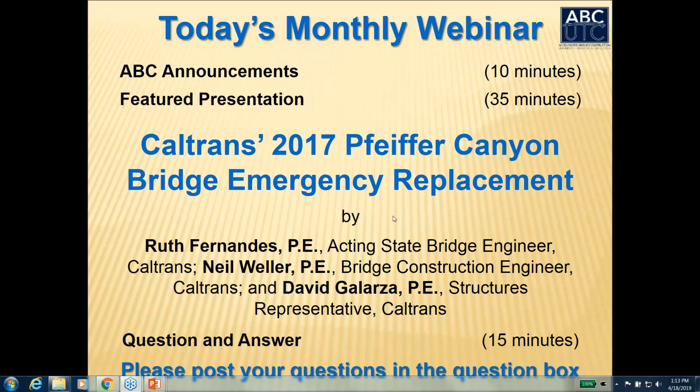Thanks, Mary Lou. This is Ruth Fernandes, Acting State Bridge Engineer at Caltrans. First, I'd like to thank the ABC-UTC for providing Caltrans the opportunity to share one of our more unique and exciting ABC projects with the national bridge engineering community. Today's webinar will be on the Pfeiffer Canyon Bridge Emergency Replacement Project located on Scenic Highway 1. This emergency project gave Caltrans the opportunity to use the ABC method of longitudinal launching for the first time in California.

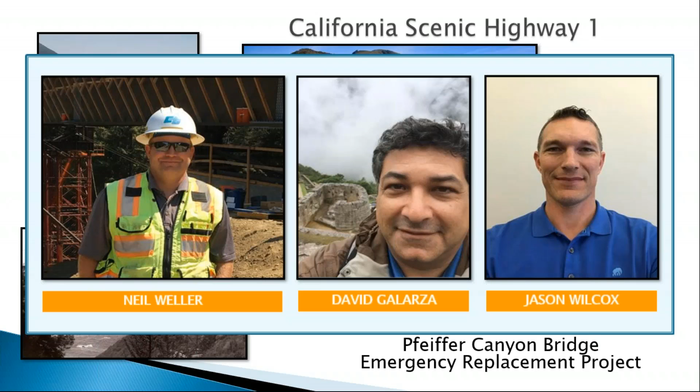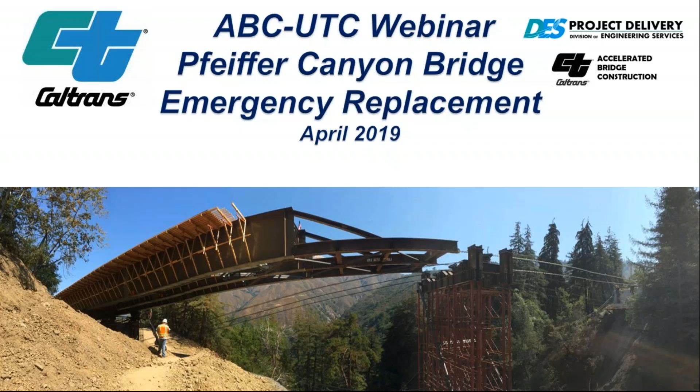Thank you, Ruth. My name is Neil Weller. I'm with Caltrans, and I'd like to begin our presentation. This is on the Pfeiffer Canyon Bridge Emergency Replacement Project. It began in February of 2017, and the completion of it was October of 2017 of the same year.

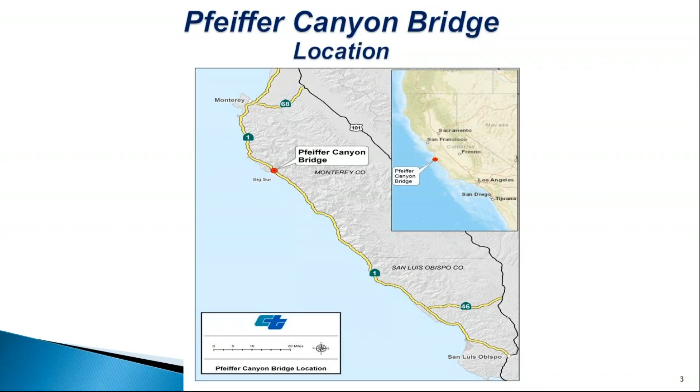I'll give you a brief overview of the location. It's in California on the Scenic Highway 1, located between Monterey and San Luis Obispo near the Big Sur community. Some points of interest along this route are the location itself, Pfeiffer Canyon, which is near Big Sur, just south of Monterey and Carmel. Some other areas I'll point out are Cow Cliffs, located to the south, Paul Slide, and also Mud Creek.

So the timeline of events for this project: the initial incident was discovered on February 11th, 2017, by a hiker underneath the bridge, who notified California State Parks and Caltrans. We ended up closing the bridge on Saturday, February 11th. On February 13th and 15th of the following week, we had controlled evacuations from the south. Later that week, large rain events caused the landslide underneath the bridge to further displace the Bent 3 column. On February 21st, a week later, the bridge was closed indefinitely.

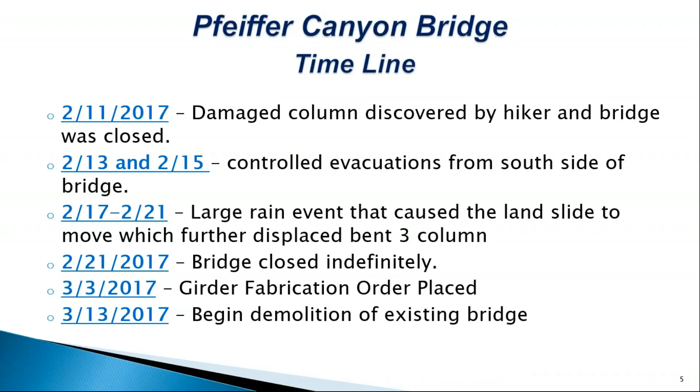On March 3rd, the girder fabrication order was placed. Approximately mid-March, we began demolition of the existing bridge. Approximately mid to end of April, we began foundation construction on abutment 2, to the north. Beginning of May, Highway 1 was permanently closed from the south at the Mud Creek site. A fairly large landslide occurred on May 20th, which closed Highway 1 from the south for approximately a year to a year and a half.

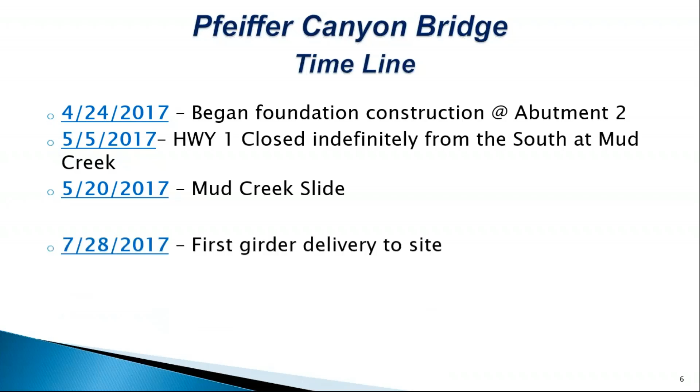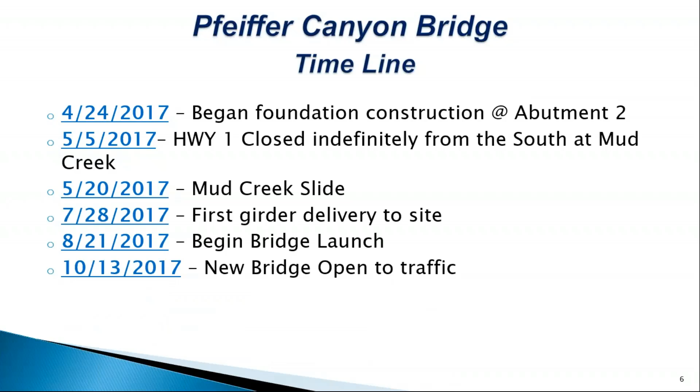End of July, we received our first girder delivery to the site. At the end of August, we began our bridge launch. In mid-October, the bridge was open to traffic.

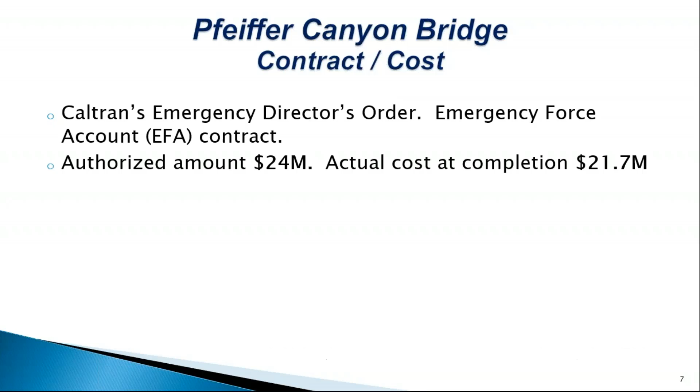To summarize the contract and cost: the delivery method for this contract was a Caltrans Emergency Director's Order. It was an emergency force account contract. The authorized amount was $24 million, and the actual cost at completion was $21.7 million. The contractor Caltrans selected was Golden State Bridge out of Benicia. The scope of work included demolition of the existing failed bridge, construction of the new Pfeiffer Canyon Bridge, reconstruction of the roadway facilities and conforms, and completion of the restoration work.

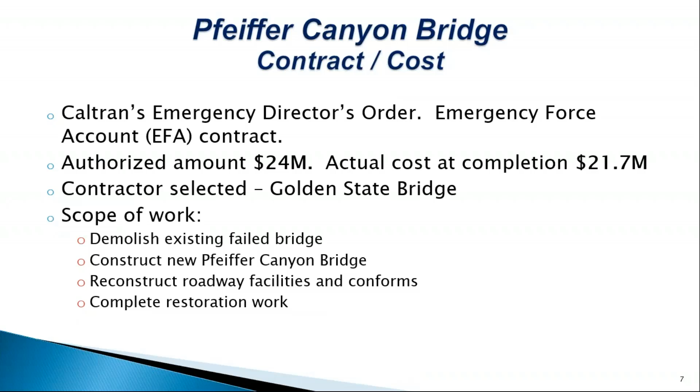The existing bridge was a 3-span, 3-cell, continuously reinforced concrete girder bridge. Bents were founded on single 6-foot diameter reinforced concrete pile shafts. The abutments were seat-type abutments founded on spread footings. Overall length of the bridge was 317 feet, with an overall width of approximately 34 feet. The traffic configuration was 1 northbound and 1 southbound lane with approximately 2-foot shoulders.

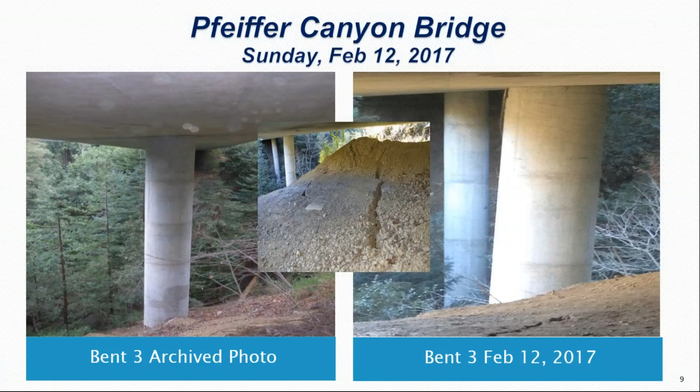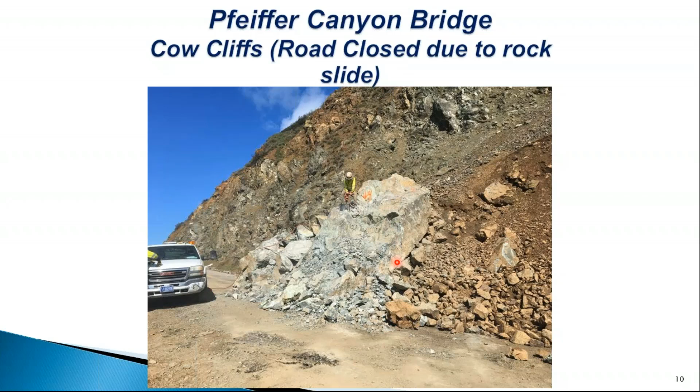This was down at Cow Cliffs, which I pointed out earlier. The road was closed at this location due to a rock slide and large boulders blocking the road. And I'll tell you why this is important.

Pfeiffer Canyon Bridge was closed to the north. The road was closed to the south at Cow Cliffs, so approximately a 30-mile stretch of Highway 1 was essentially landlocked. There was no way in or out. You have a large mountain range on the easterly side and the Pacific Ocean to the westerly side.

We came to the site and did some investigations, and we decided to allow controlled evacuations, to allow residents and also guests - there are numerous hotels located in this 30-mile stretch - to evacuate the area so they can go get some supplies or just go home.

We allowed approximately 3 controlled evacuations. We did 1 on Monday. We did 2 on the following Wednesday after the bridge closure. We did continuous monitoring of the bridge, the column, the deck, monitoring for deflections and displacements, and the bridge actually performed fairly well.

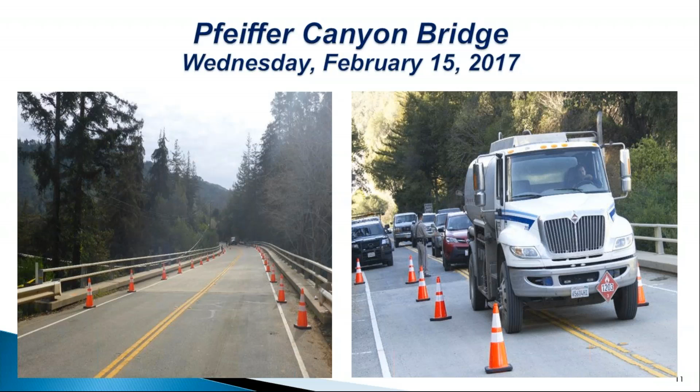The reason we did the last evacuation on Wednesday was because of an impending rain event that was forecasted to come Thursday through the following Monday. I believe the area received upwards of 4 inches of rain.

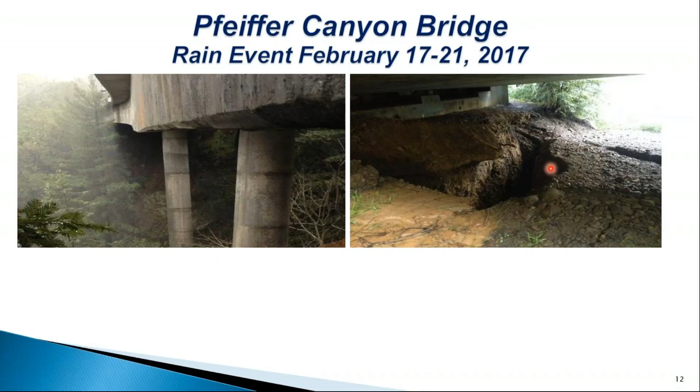As you can see, we had the initial photo of this crack, but now it's growing. So the landslide has mobilized even further.

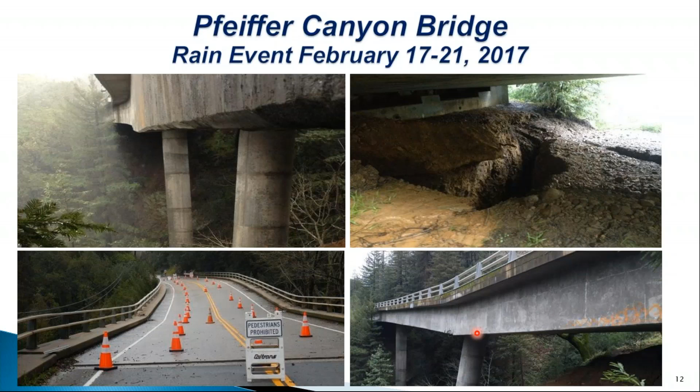Also, you can see right here there's obvious deflection in the deck itself, and also the girder or column support was further displaced. At this point, we closed the bridge permanently.

Here are some more photos of the actual damage from the landslide displacing the column. As you can see in the soffit, there are cracks, and also cracks at the column-soffit interface. This photo is from the southern side. So here's bent 2, and bent 3 is in the foreground, and you can see the displacement.

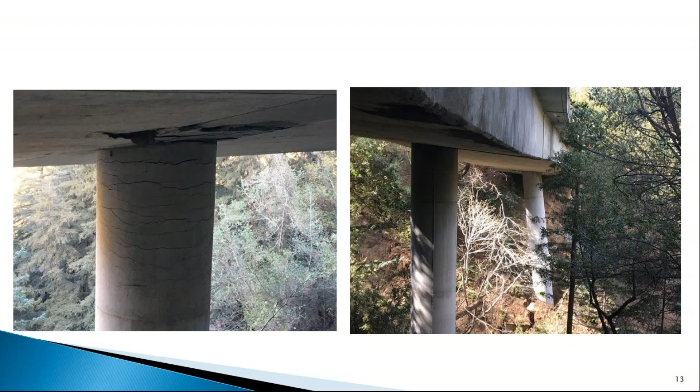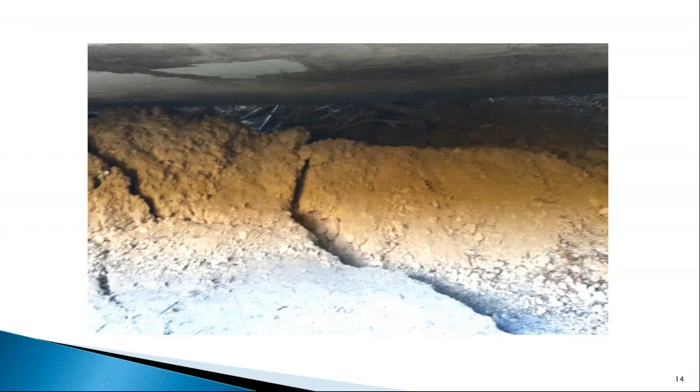Here's a video of underneath at abutment 4. This video was shot approximately mid-March, and it shows lots of displacement in the hillside, and then as we sweep to the left, you'll see the column being further displaced.

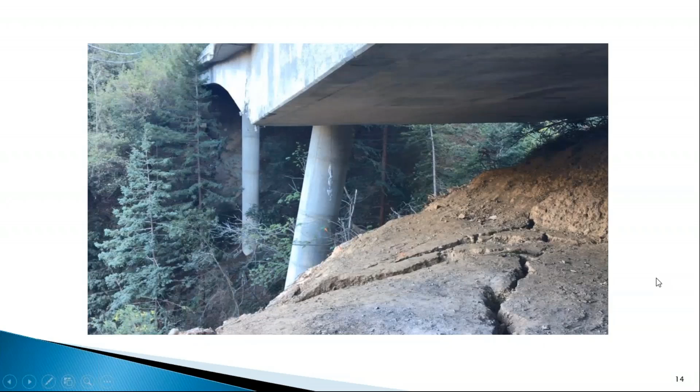And here are some more photos for that. The bridge never did end up collapsing on its own. We did have to demolish it, but this was the bridge in its final state prior to demolition.

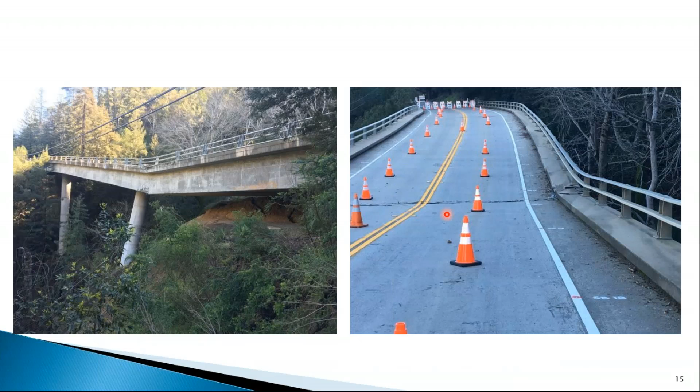Since we knew we had to replace this bridge, Caltrans formed a team to assess the site and come up with a plan. We ruled out conventional methods of construction, such as reinforced concrete or post-tensioned concrete, due to temporary supports being required in an active landslide.

If you see to the right side of your screen here, this is the area where the active slide was. There was no evidence of sliding on the left side, so we wanted to keep any type of supports out from the left side of the bridge.

We went with steel because we could go in shorter segments. The route from the north is a fairly narrow 2-lane road. We felt comfortable being able to navigate 60-foot long girders down the road. The one thing we had to eliminate were supports in the slide area, so we decided to go with a launch method, which would go over the slide.

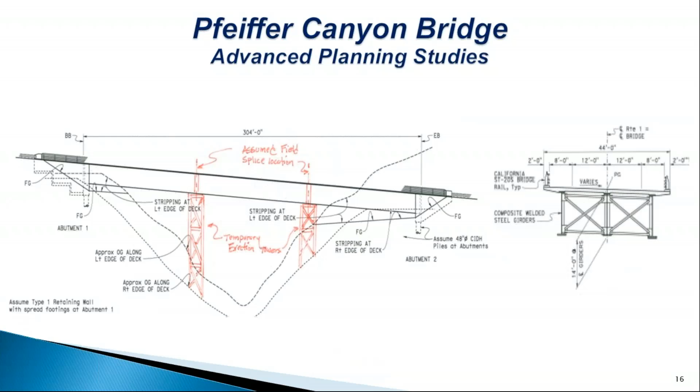The initial design was a hybrid girder with 70 KSI steel flanges. After investigation, finding out that material procurement may be an issue, we came up with two designs: a hybrid option with 70 KSI steel, and an all 50 KSI steel option.

So the final design was a 315-foot single span bridge, spanning the canyon in the slide area. The girders were 50 KSI steel composite welded steel, approximately 14 feet tall. The webs were 1.25 inches thick, and the thickest flange was 4 inches. The bridge had 3 girder lines that consisted of...

In addition to the final design, we did provide 2 different designs. The 70 KSI steel design had the webs and top flange being 50 KSI steel, and the last 2 segments were all 50 KSI steel in the low moment regions, while the middle 3 segments' bottom flange were 70 KSI steel. As I stated before, we went with the all 50 KSI steel design.

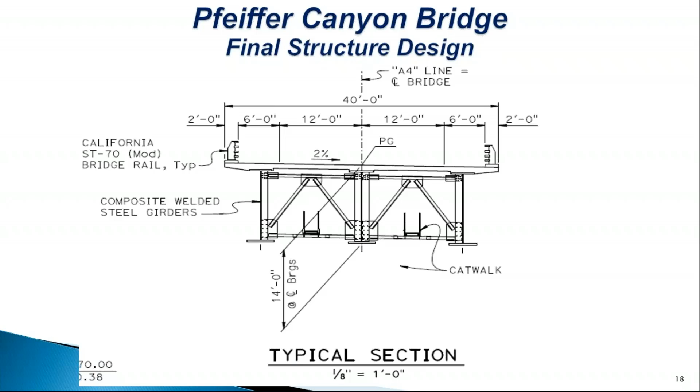Things we changed in design to accommodate the launch process: the bottom flange had to be flush, so they could roll over the rollers. What that ended up creating was a variable depth web.

Another thing that we did was with the bottom splice plates. We had them in 3 sections, and we eliminated the middle section of the splice plate to accommodate the rollers. These were later installed after the launch was complete. You'll see that here - middle section omitted - and you can see that's completely flush.

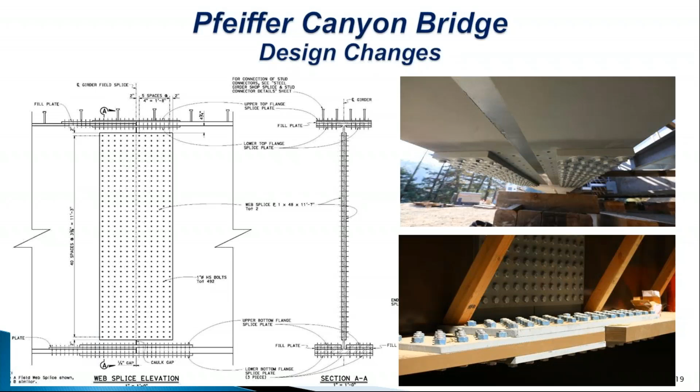Good morning, everybody. Now, to give a quick recap of the timeline, the deflected column was found February 11th, and by February 28th, there was a set of check plans for fabricators to bid on.

First being a 3-line hybrid grade 50, grade 70 high-performing steel option. Second being the 3-line all grade 50 option, and then anything else the fabricator could come up with. The weathering steel was excluded because the project is just under a mile away, about 9/10 of a mile away.

So the request for proposals were due 41 hours later on March 3rd at 10 a.m. Caltrans construction design met myself, and then the contractor Golden State Bridge met at 1 o'clock that same day to go over the estimates. From the outset, it was agreed that schedule was the driving force, and delivery start time and end dates were weighed heavily.

As Neil said earlier, a primary concern was the availability of steel and the grades and sizes required by the design, which we learned was between 8 and 12 weeks.

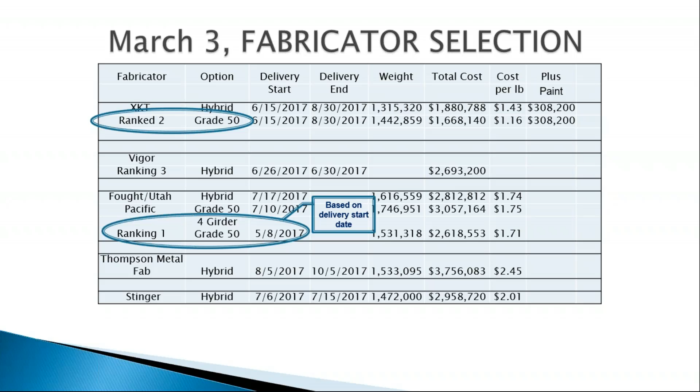And we were discussing the merits of that when it was realized and noticed that XKT had submitted a revised proposal that came in just before the deadline. In that proposal, there's the cost, and they said that they spoke with a Nucor mill, and said that for an extra $457,000 about, they could expedite the delivery, and their delivery start date for the girders would be April 15th.

So this was being discussed, and me and a coworker reached out to the owner of XKT to confirm that this was even an option, and they said that they would be willing to sign a contract to this effect immediately. So within 10 minutes of finding the revised estimate, XKT was chosen.

To add to this timeline, this decision was made on March 3rd, and on March 3rd, as Neil said, orders for steel started to be placed out, and by March 8th, about 800 tons of steel was ordered. By March 11th, Nucor began rolling steel that was not already available, and by March 17th, the first plates arrived at XKT. Because of the speed of the project and shop drawing review and revision times, we had to hold off just a little bit, but on April 4th, the first girder web plates were being cut.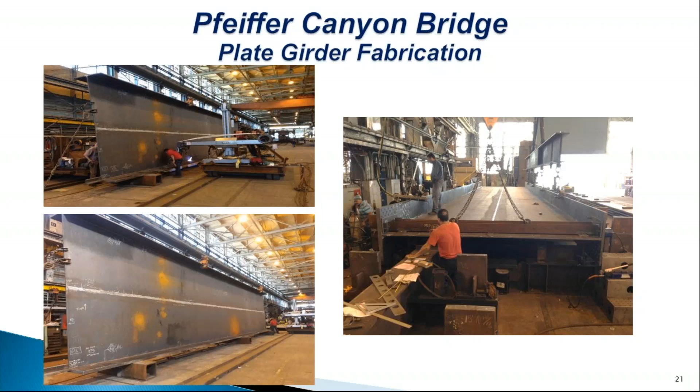This is a side view of the 4-inch thick bottom flange, the A709 Grade 50, 4-inch thick bottom flange. Just like the webs had to have a longitudinal splice, the bottom flanges were so thick that the mill could only make them in 30 to 35-foot segments, so they had to actually do a horizontal splice on these. I'm going to go through all of these.

The first girder rolled out of the shop to the fit-up yard on May 10th, just 36 days after the first web plate was cut and just 2 months after the steel was ordered. Camber was checked with 3 adjoining segments, and the remaining flange and web holes were match drilled.

To facilitate assembly and erection in the field, it was agreed to fabricate the first segment of each girder line first, then the second, and so on. Once the first 3 segments of each line were checked for camber and match drilled, the first segment of each line was sent to the painter, R&B Coatings in Linden, California. Trial assembly was completed on June 21st, and the final 3 segments were shipped to the painter on July 24th.

The paint used was polysiloxane, and the finish coat was applied in the shop. This polysiloxane for this application was estimated to last between 60 and 100 years, and it was applied over inorganic zinc primer at the shop. The first 3 segments arrived on site around July 28th, just 167 days after the column issue was discovered.

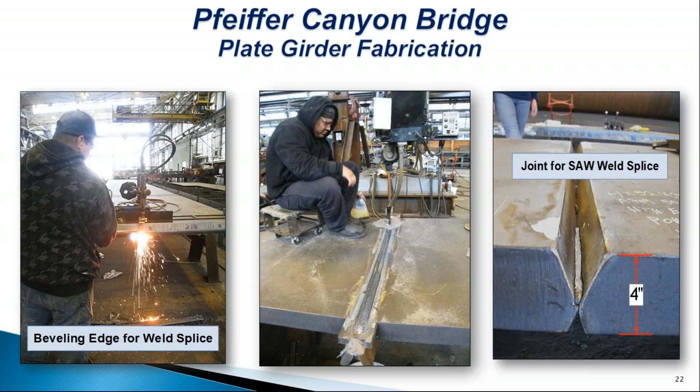And with that, I'll pass it back to Neil. Thank you, Jason. So real quick, I just want to go over some of our construction challenges in the field.

As you know, this is a very scenic, windy, rural road, Highway 1, in between San Luis Obispo and Monterey.

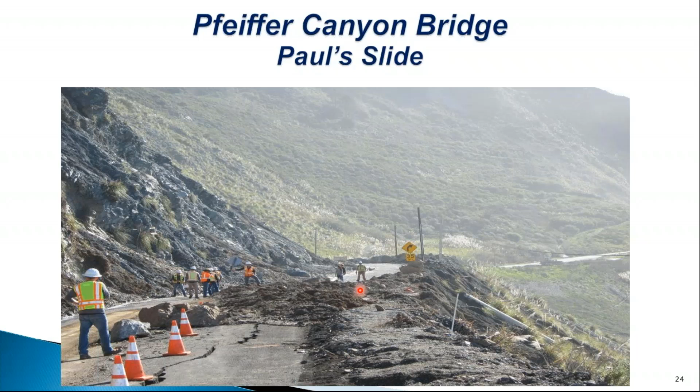This is Paul's Slide. As you can see, the road is, we had an active slide, and right through here, I have an aerial photo coming up next, but a crib wall actually failed here. We're down to 1 lane.

Mud Creek, this was a daily occurrence. They had to clear the road every single morning to allow, essentially the road was closed, but to allow construction traffic and Caltrans crews to get through to do their work.

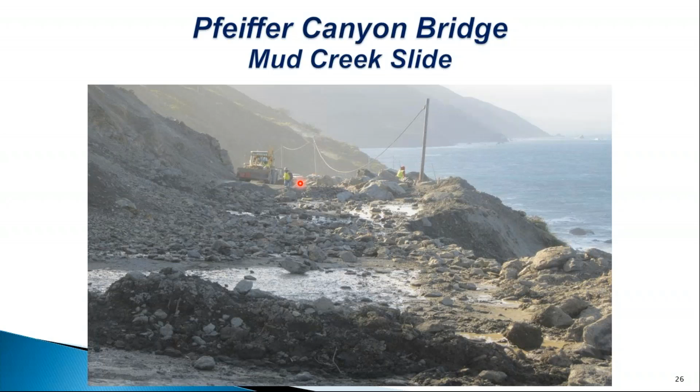On May 20th, I believe it was, here is actually the Mud Creek slide. As you can see here, this is Highway 1 to the north and to the south, and this added roughly 10 acres of new coastline to California.

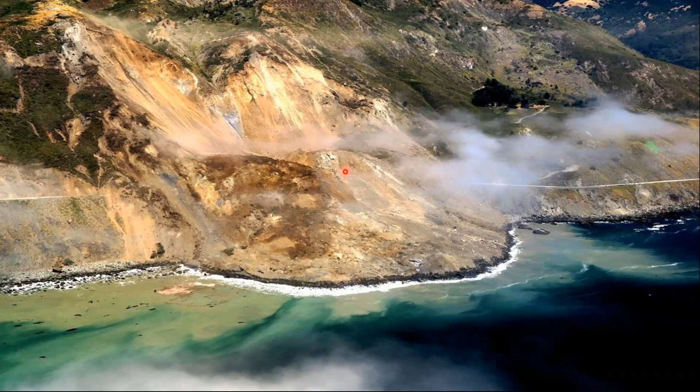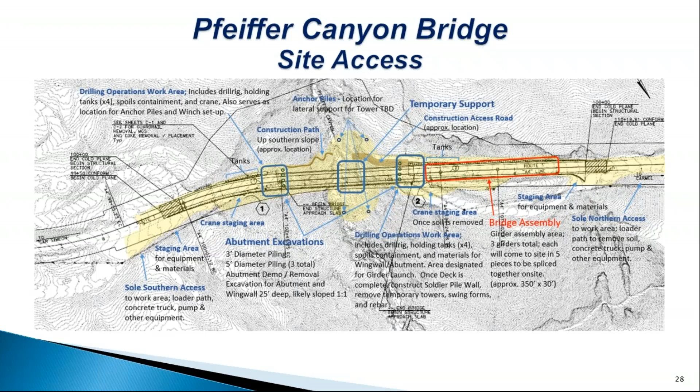Canyon access was very steep. To the south, a very steep slope, which was very stable. And here's the active slide area with the famous column that was damaged.

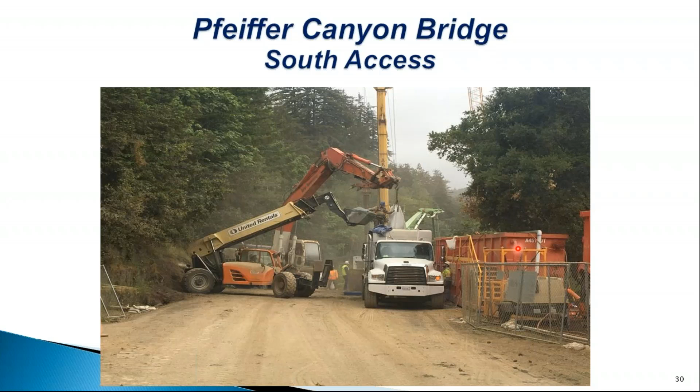Here's a shot from the south side. We ended up using mobile concrete mixers, and all the supplies needed to batch concrete were staged on the south side. As you can see, very narrow work area to work in. Access from the north, same thing, very narrow. We could only do a few operations at a time due to the limited constraints.

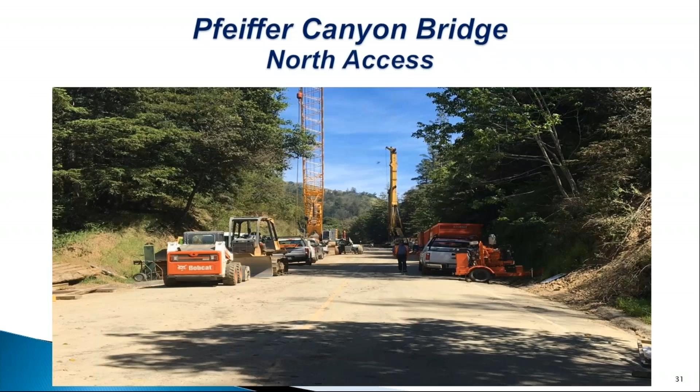Here's some photos of the bridge demolition. Here's span 2 coming down, and its final resting spot, and span 1 coming down.

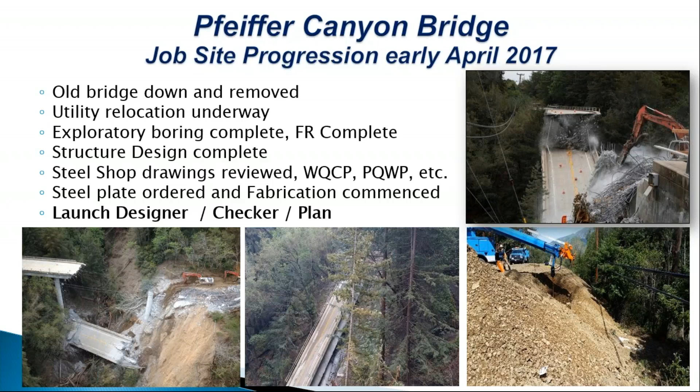Over the next several months, from April to July, we focused on constructing the abutments on the north and south. These are cast-in-place abutments supported on cast-in-drilled-hole piles, 5-foot diameter, approximately 80 feet deep. They were cast using the slurry displacement method, as there was still quite a bit of water in the surrounding hillside. We had also commenced work on the temporary tower, a prefabricated element on a step foundation.

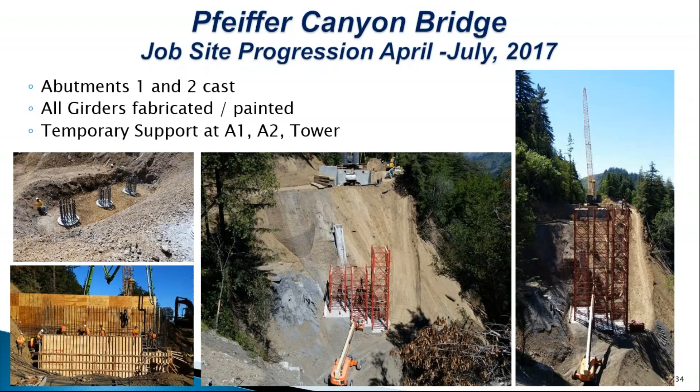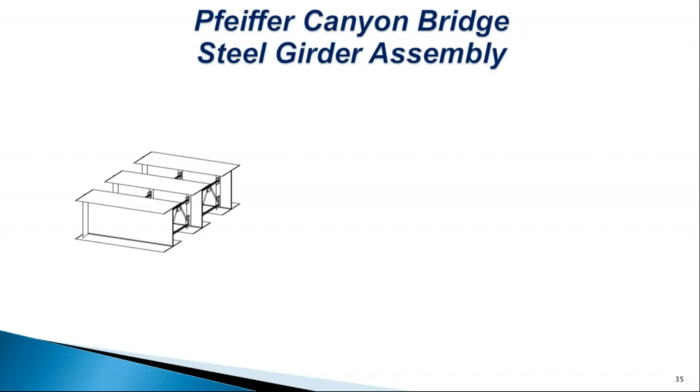This little animation gives you a graphic of the girders and how we planned to assemble them in the field. Essentially we have 3 girder lines. Each girder was broken down into 5 62-foot long segments for a total of about 310 feet. Each girder weighed approximately 60 tons, though some were a little bit lighter than others, especially toward the end span.

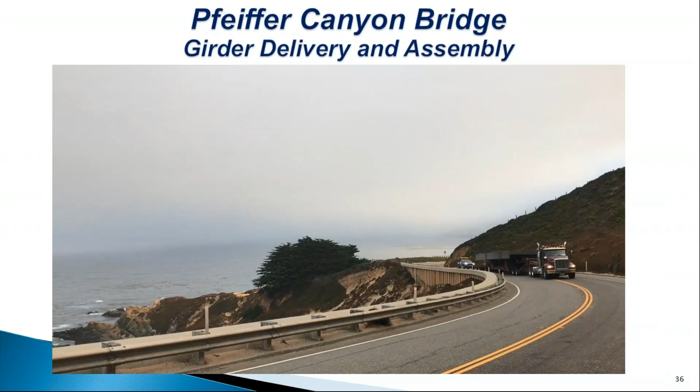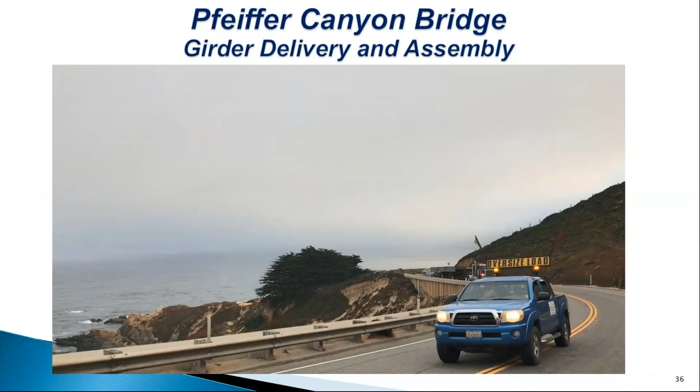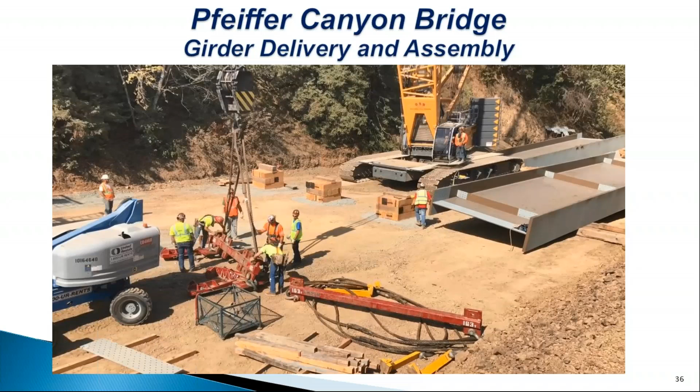This short video shows delivery of the girders. These are coming out of Mare Island, approximately 200 miles north of the site, maybe a little further. These are about 60 tons each, and we'd bring them out in 3 segments at a time. They were offloaded from the trucks and then positioned on dunnage, which was graded to the camber of the webs to facilitate splicing. The girder is erected into vertical position and then moved to mate with the adjacent preset girders.

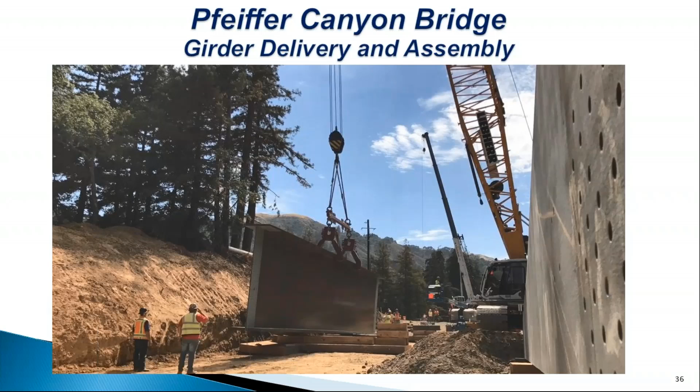The launch plan developed by Somerset was broken down into 5 distinct areas: the assembly area, which we saw in the short video, and connected to its leading edge is a launch nose. The purpose of the launch nose is to collect the tendons doing the actual pulling of the girders and distribute them equally among each of the 3 girder lines. It's also there to extend the reach of the girders and act as a lightweight section.

Because the temporary tower was very good at resisting vertical loads and not very good at resisting any horizontal loads, it became necessary to ensure that the nose of the launch rode up and over the rollers at the temporary tower. This was accomplished by lowering the girders in the assembly area, the temporary support in the assembly area, and thereby pivoting about the abutment 2 temporary support, raising the launch nose so it would ride up and over the rollers, as shown in stage 5.

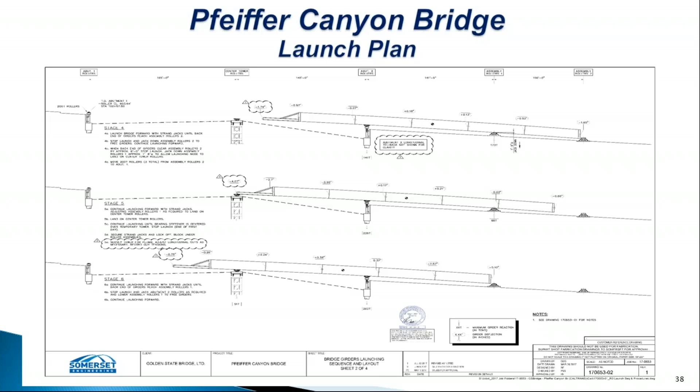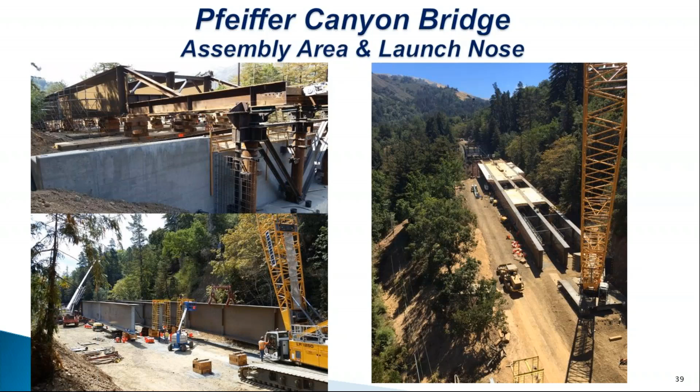That's what's actually performing the work to pull the assembled girders across the canyon. They're topped with a pair of 200-ton Hillman rollers, two 200-ton Hillman rollers, and at the top of the pipe supports, you notice a couple of 1'4" sections. Those are to be removed later so that we can adjust the trajectory of the launch.

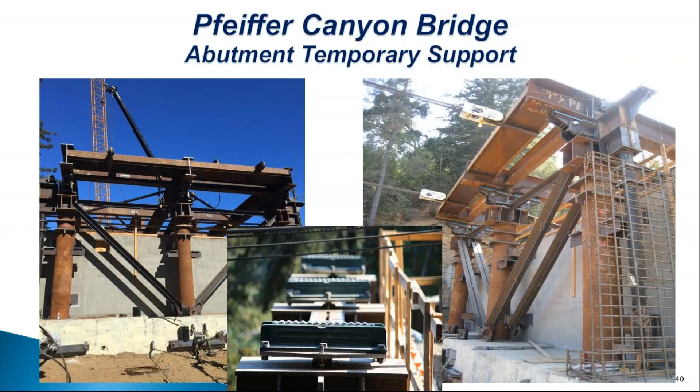The temporary launch tower is a Waco tower, very efficient at carrying vertical loads. This tower was comprised of multiple 100 kip legs, but not very efficient at addressing any horizontal loads. So restraint was provided by some push-pull pipes. These are taking up any transverse loads and are founded on two CIDH piles.

At the top of the tower, it's connected to a grillage that houses the assembly rollers. In the longitudinal direction, each roller was restrained by two 3/4" wire ropes that are cast into the abutment face. As you can see, those wire ropes are going directly to the rollers so that as loads are induced or as displacements want to be induced into the tower, they're picked up immediately and dragged back to the abutment face.

On the far side of the canyon is the jacking frame. The jacking frame is also made up of heavy steel section and bolted directly to the top of the end of the wing wall. The wing walls are prop supported on 36-inch CIDH cast-in-drilled-hole pile, so there's deep foundations that the loads will be directly braced to.

There are two hydraulic jacks. These strand jacks are 235 kip capacity. Somerset calculated that he needed 110 tons of force to pull the girders across the canyon. Now, he purposefully designed these to have double the capacity that was needed in case one of these needed to get repaired or there was a malfunction. The remaining jack could hold the entire assembly in place.

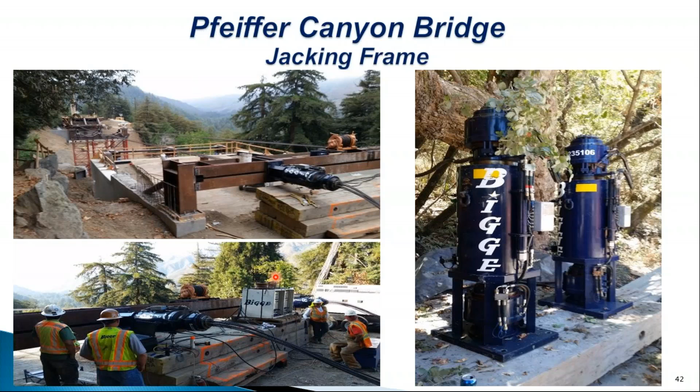In our schedule, we had allocated 3 days for launching, and we essentially accomplished that. It went off very well. There was very few incidents as we came across.

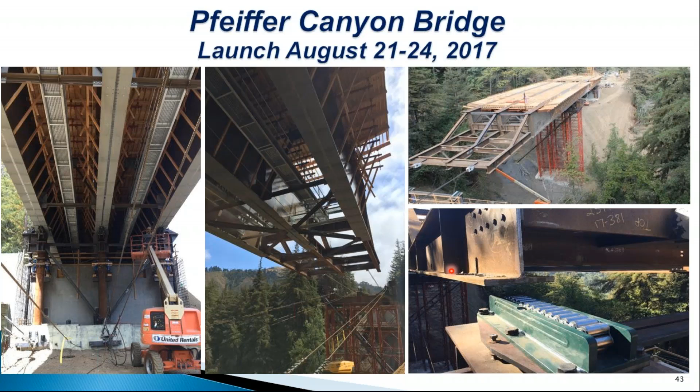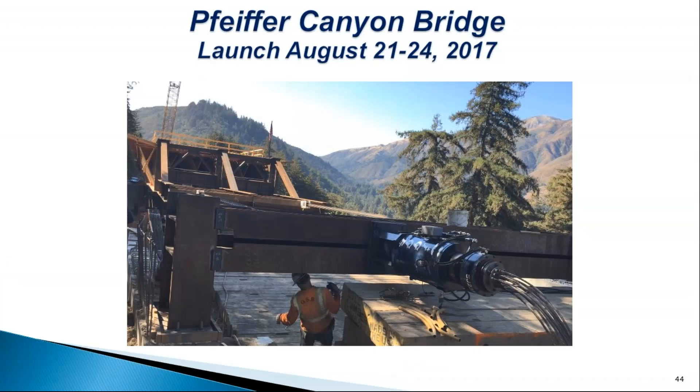It's a short time lapse video of the hydraulic jacks working. You're looking at the left jack right now. The right jack is progressing similarly. This is about an 18-inch stroke.

For those of you familiar with stressing post-tension bridges, this is very similar. This is an all-encompassing unit, so it's got a stressing head, and it's got some relieving wedges that go ahead and grab and hold the system in place once it's cycling back.

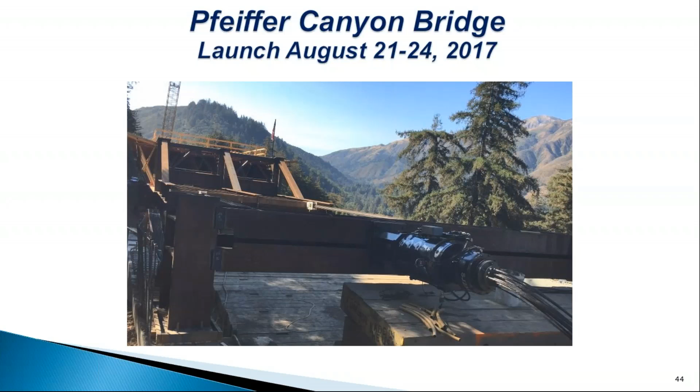As the launch was progressing, we got slightly out of horizontal alignment. As you can see from the center slide, the center line of the web doesn't correspond with the center line of the assembly roller. The contractor attempted to correct the horizontal alignment by installing shims between the horizontal guide roller and the edge of the flange, wanting to rotate about the intermediate temporary support. There was limited success in this.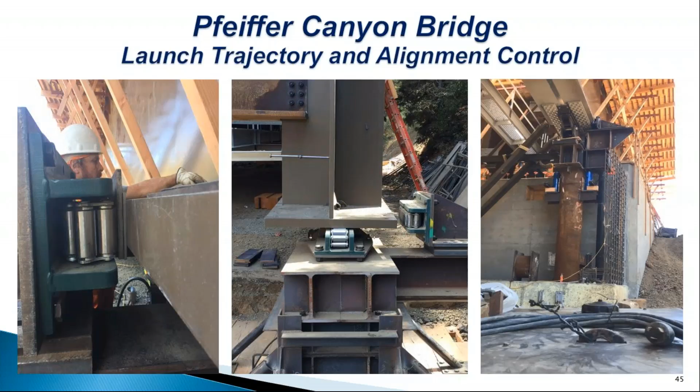It was vitally important that we perform monitoring of the launch while it was happening. To do this, we set up a total station and operator along the hillside, with multiple targets on the launch nose and on the grillage atop the tower, to ensure the tower wasn't exceeding its maximum displacement and that we were meeting the targets we had envisioned for the trajectory adjustment.

Since we were on a straight alignment, it was easy enough to set up a theodolite and operator further down station to check the center line of the pole as we pulled across. He was in radio communication with the total station operator to ensure they were seeing the same things. As an additional redundancy, we placed plumb bobs on the tower and manually monitored displacement. Our maximum allowed displacement was 1 3/4 inch for a tower approximately 75 feet tall, and I think we slightly exceeded that, but by then we were across the canyon.

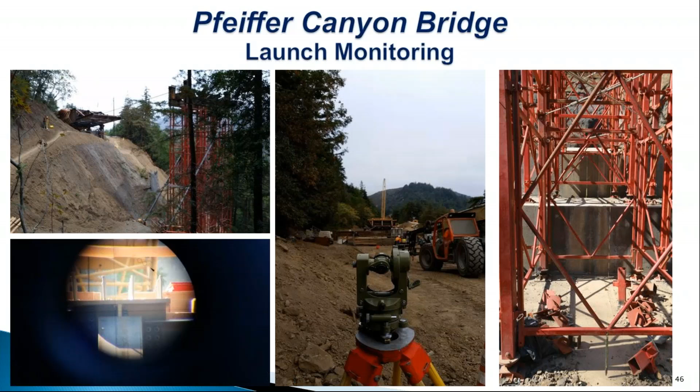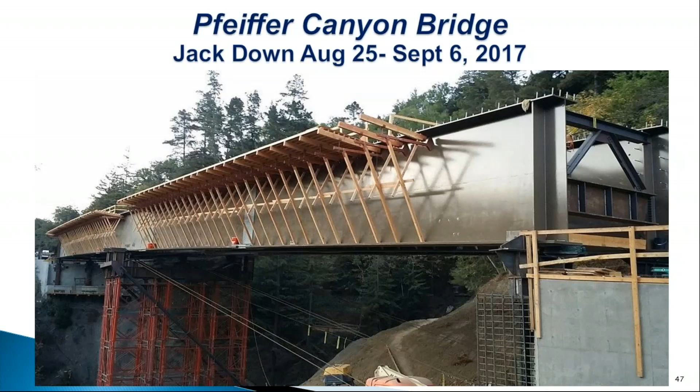Here you can see the load transfer from the 3 temporary supports to a cribbing stack, approximately 16 to 18 feet tall, comprised of 12 by 12 timbers. These 3 pipe supports were removed and transferred to the cribbing stack. The plan was to cycle back and forth between the cribs and the hydraulic jacks, lowering 1 foot at a time on each abutment, essentially seesawing all the girders down in place. Above the cribbing stack there's a temporary jack down frame that facilitated the lowering and was removed prior to casting the abutment end diaphragms.

As the work was progressing, we started to lower the bridge and got offline longitudinally, which had the effect of walking the jacks off the center line of the cribbing stack. You can see a gap developing between the abutment back wall and the back of the cribbing stack, which caused us quite a bit of concern. The contractor was able to stop and reposition the girders longitudinally using the rollers.

The next slide has a very good time lapse, provided by Mr. Kyle Evans, a local Big Sur photographer who was kind enough to let us use this for this presentation.

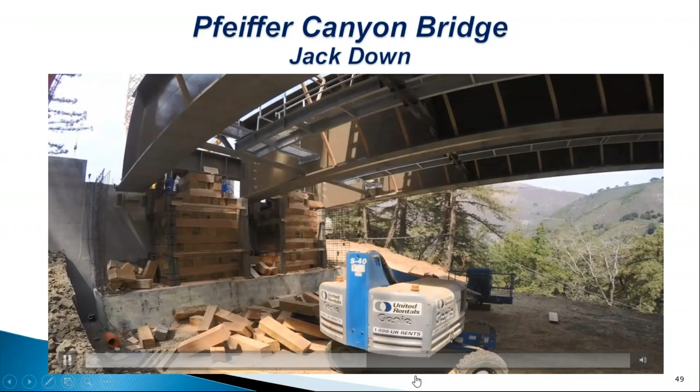What I wanted to show here was the horizontal alignment push, and then the final cycle. So there he's repositioning, stabilizing, doing his horizontal alignment. The final cycle was just a sequence of jack down - you can see him removing the upper cribbings here in just a minute, resetting the jacks, and then removing the top 4 cribs to lower down.

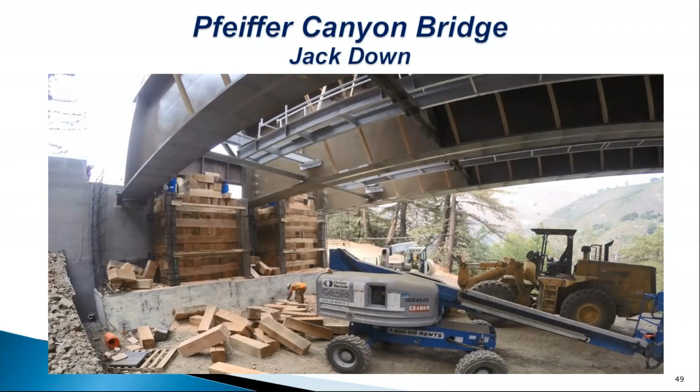There he's removing cribs, jacks will be extended. Remove those 12 by 12s and then lower down. And that was our 12-inch jack down. And then we'd walk to the other side of the canyon and lower that down 12 inches.

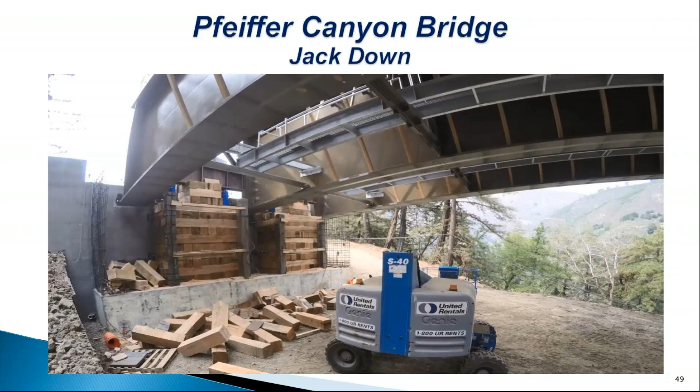We made it down to the abutment seat. The Eagle had landed. And at that point, we were into our conventional methods of plywood decking, completing the Nelson studs, our reinforcement, and our deck pour.

We chose to do a night deck pour. The concrete that we used was normal weight concrete, approximately 550 yards for the deck and the southern approach slab. And then on October 13th, the bridge was functionally complete.

There was a fairly large opening ceremony, and traffic was restored to public service on the afternoon of the 13th. I believe it was Friday the 13th. Yep.

At the completion of the job, there were several awards, multiple internal Caltrans awards, as well as local Transportation Agency for Monterey County awards. We were nominated for an AASHTO award, and I believe 2 American Public Works Association awards.

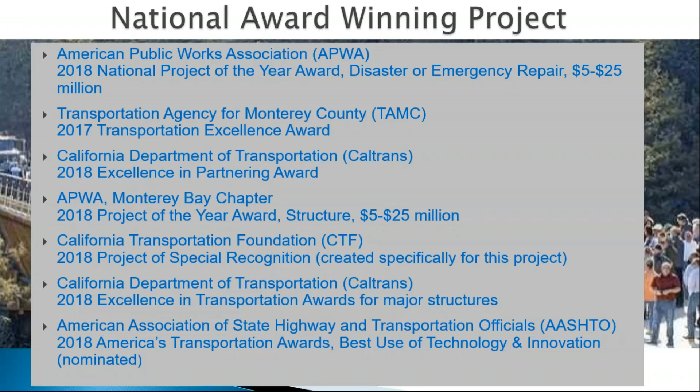As kind of the majority of the team, obviously it was a much larger team supporting this effort, but many thanks to Golden State Bridge, XKT Engineering, and Somerset Design, as well as Kyle Evans Photography.

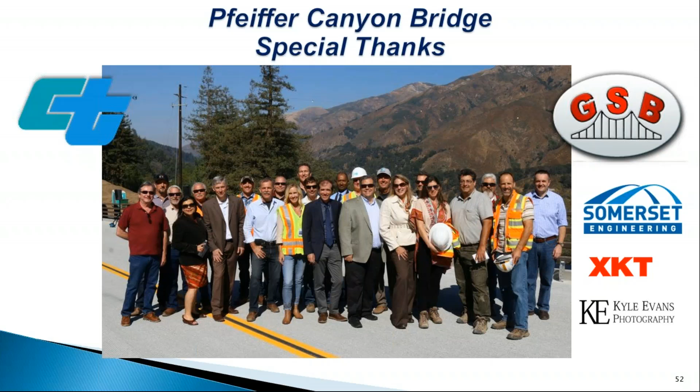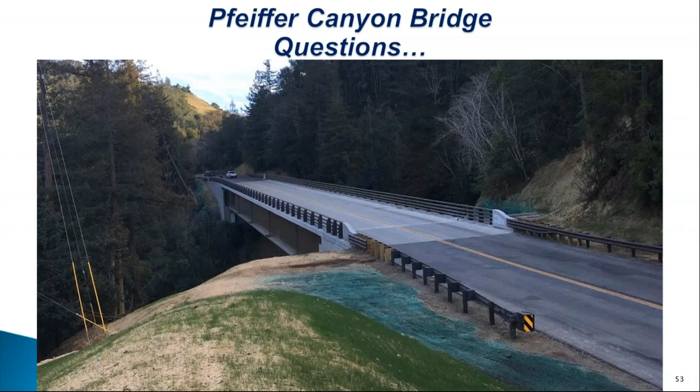This is Neil once again. So this will conclude our presentation of the Pfeiffer Canyon Bridge. As we're discussing questions and stuff, I'll play a short time lapse of the actual launch.

And that officially concludes our presentation.

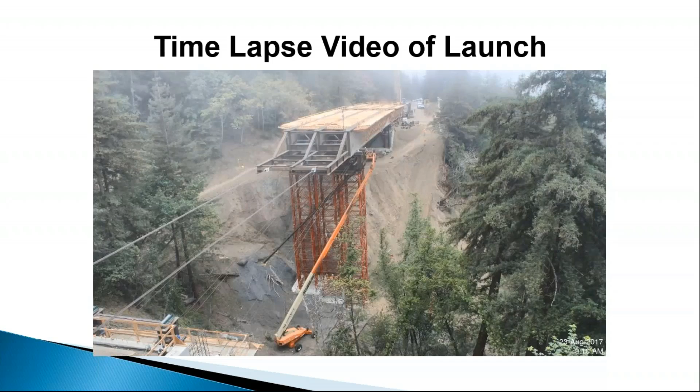Okay, y'all, that was a very, very interesting project. We've got a number of questions that came in beforehand, and then some that have come in during the presentation, so we'll get into those in just a second. We've got them broken down into groups of construction and management, and then lessons learned, and cost, and then design. So with that, we'll go ahead and start with construction and management.

A question came in, or a comment said a summary presentation on claim handling would be interesting and beneficial to those considering ABC. Did you have any claims at all on the project? Well, it was an emergency project at force account, but no, there were no claims. All costs were handled directly as billed.

Okay, that's usually what it is with emergency, so that's good. Then, were there any impacts to the project schedule due to the environmental permits?

You know, surprisingly for an emergency job, there were permits that were required from the California Coastal Commission, as well as Fish and Wildlife. But effectively, they wound up deferring all mitigation until after the project was complete. So there's a subsequent project that's dealing with some additional planting and relocation of utilities, so they're not a visual obstruction. So it did not affect the schedule during the course of the job, but once the job was completed, we're responsible to comply with the permits afterwards.

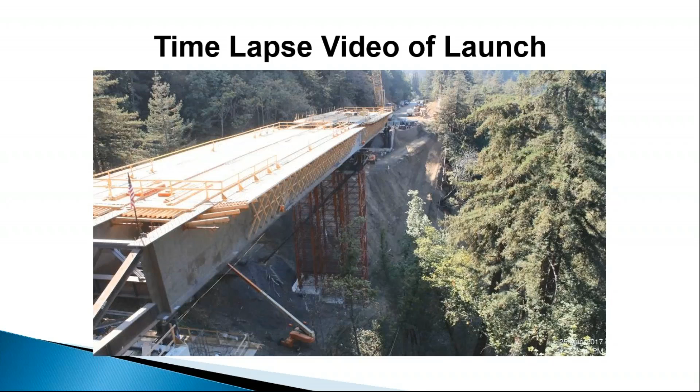Yeah, the initial demolition plan was to use a wrecking ball. We didn't want any personnel on the bridge itself due to its unstable state, so they came up with a plan to use the reach of the crane and strategically massage or crack up the bridge deck at key locations where it was failing, hopefully accelerating its collapse. We had some mechanical issues with the crane, so it had to be reconfigured to work, and we did end up using the wrecking ball, roughly on day 3 after the bugs were worked out. Unfortunately, since we reconfigured the crane, the reach wasn't as far as we wanted, so we could only really get to roughly span 2. They used the wrecking ball to break through the deck, and after the bridge bound up on itself and wouldn't move anymore, we went with traditional methods using excavators with hoe rams, demolishing each span that way.